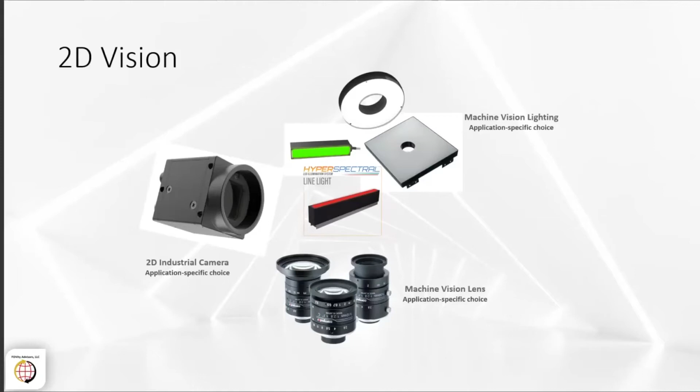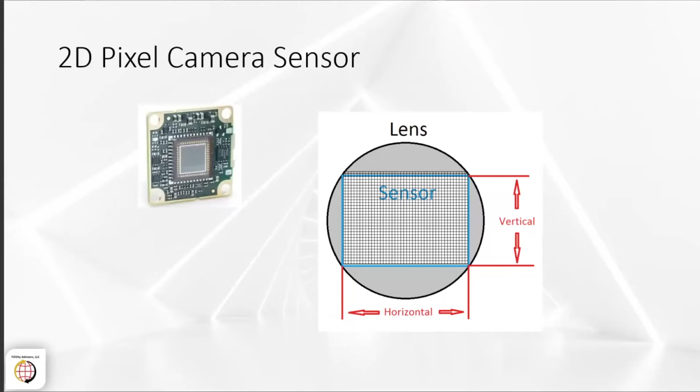You start with a 2D pixel camera sensor. And then to that, you add a lens, which focuses that light over that pixel matrix. The pixel matrix then, when we see what the intensity of the light is at each particular pixel, we can begin to get some information about what's in that image or in the scene that we're looking at. We can get grayscale information, we can detect edges and patterns, and we know size and shape because we know what the horizontal and vertical addresses are for each one of those pixels and the corresponding grayscale.

So the data that's returned is X and Y position and intensity from 0 to 255, with 0 being black and 255 being white. If it's a color camera, they'll put a different color filter over each one of the pixels, and then software decodes the various grayscale values for what the corresponding colors would be.

To calibrate for size, we put a known grid, something of known dimension, in the field of view of the camera. Typically it's a dot grid, though it doesn't have to be. We know what the distance is between the dots, and because we know that distance, we can translate from pixel space to world space. This can also compensate for lens aberrations.

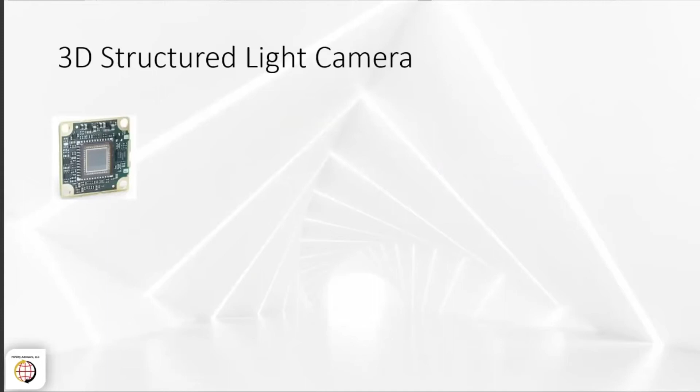By projecting a series of patterns, you get some light displacement, and through triangulation you're able to see what the patterns are and what the depth is. So again, you start with a 2D sensor, the same type you have with 2D vision, the same kind of lens, still focusing that light intensity information onto the pixel matrix.

So the question becomes: what's the geometric relationship based on the apparent positional displacement of the patterns? If you project a sufficient number of patterns over an object, you can get detailed information on the geometry of that object.

In comparison to a 2D sensor, with 3D vision data you still get the intensity from 0 to 255, the same as before. But you also get X, Y, and Z location—so in addition to horizontal and vertical, you get a depth location. The difference is a term called the voxel, a volume pixel, as opposed to the pixel used in 2D. In the 3D world, they're called voxels, and that's the location within a point cloud.

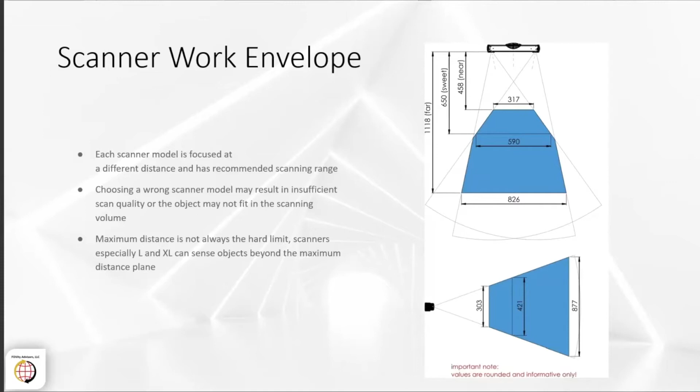And again, the reason is that just as in 2D world, you've got a certain depth of field, a little bit of flexibility there that you can work with. You have the same thing in 3D world. Again, the optics are the same. We're just working with a different structured light.

So the PhoXi 3D scanner product family, then, if you look at the specifications to the left, the purple, the little XS, the optimal working distance there is 181 millimeters or about 7 inches, with a field of view of 4.45 by 3.27, so about 4.5 by 3 inches, and a resolution which is tighter than 2 decimal places. It's actually 0.06 millimeters of resolution.

Now, resolution is different in 3D land than it is in 2D land. Resolution in 3D land is the distance from one voxel to another, just as in 2D land it's the distance from one pixel to another. The calibration accuracy is kind of a misnomer. The calibration accuracy is actually a repeatability measurement. It's, from one scan to the next, what's the repeatability of the image that I get. So you can see we can get some really tight tolerance measurements with the XS because the field of view is small.

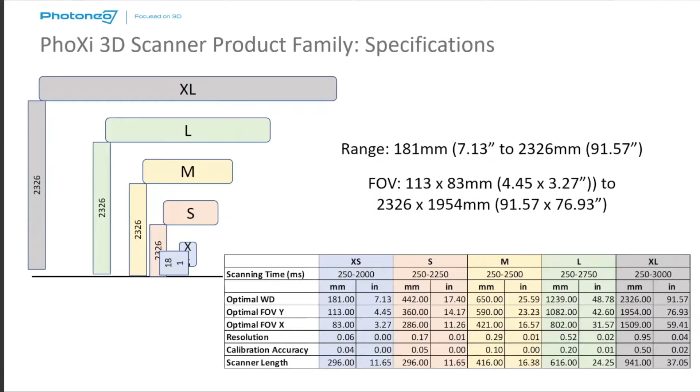But even with the XL, if we go to the other extreme, the XL has a 91-inch optimal working distance with 76 and 59 respectively for Y and X, and yet it still has 40 thousandths of an inch of resolution across that working distance. So we have a working distance of 8 feet thereabouts, and we can still go down to 40 thousandths in resolution. And also, just as in 2D land, where you combine pixels to give you a tighter resolution than pixel by pixel, the voxel resolution works the same, because you can statistically determine based on the intensity of the voxels and their location geometric attributes.

So what kind of applications would we see with 2D versus 3D? Well, in 2D, if you're looking at the surface, that's where 2D really shines. No question, you can get higher resolution with the megapixel cameras and the various high performance lenses. You can certainly get a higher resolution for metrology. You wouldn't do metrology with 3D, for example. If you're looking at image features such as barcodes, labels, if you want to do color, 3D doesn't really do color the way you can with 2D. And if you're moving fast, well, it takes time to handle all of the data on a 3D system. So if you have a high-speed application, chances are you're not going to do it with a 3D scanner.

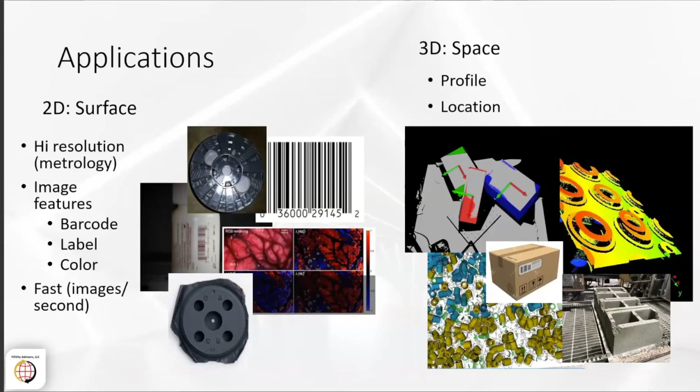But if you're interested in a profile and you need shape information, location information in 3D space, such as some of those applications there, then absolutely 3D is the way to go. And George will show you in a few moments that you can do inspections in Matrox Design Assistant in 3D that are impossible to do in 2D. For example, he's going to talk about the cookie and the depth of the cookie, and you can do coplanarity in 3D, which is almost impossible to do with 2D. You can look at other surfaces, and of course, for vision guidance, 3D is absolutely a must nowadays.

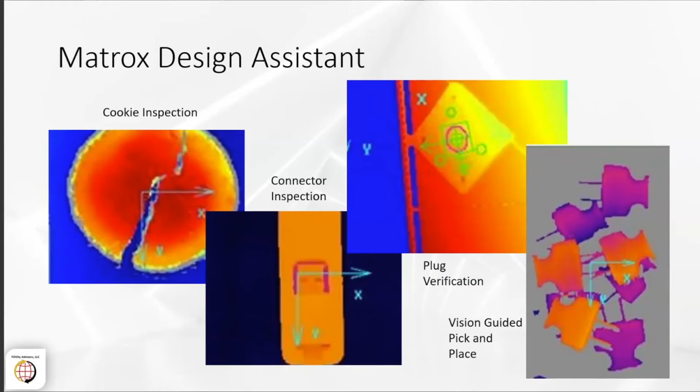In this part of the presentation, we will go over some of the software aspects of 3D inspections.

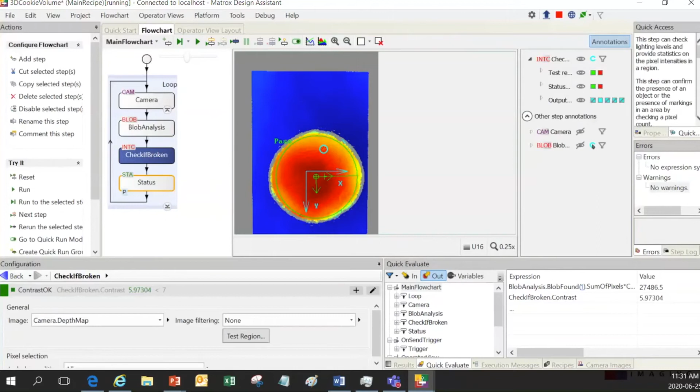The final step in my flowchart is the status step. And the status step is basically a status collector.

So it's actually going to check the pass-fail for my blob, in this case the volume, if it's within my tolerances. It can also check the pass-fail of my intensity checker to make sure that there's no broken cookies. And it will give me an overall score as an overall pass-fail.

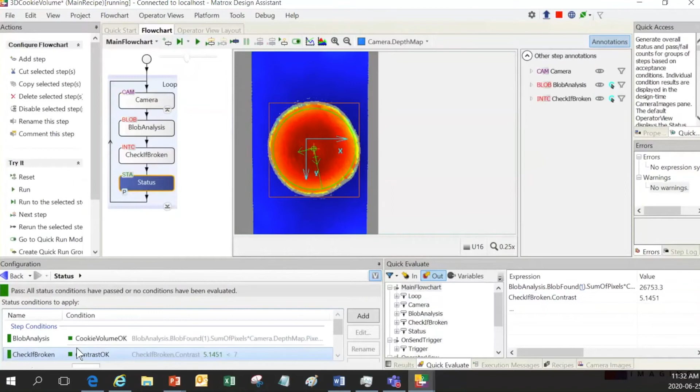So we're going to go ahead and step through and see some of the values that we have with the different samples of cookies. So this one is saying that it's a pass because volume and intensity check pass. This one is a pass as well. This one is a fail because there's contrast that goes beyond my tolerance, as well as volume is not complete. And so we have another one that is broken, and so on and so forth.

So again, Design Assistant is able to build an application fairly easily to inspect volume as well as cracks in the cookie. And obviously this could be useful in the food industry, verifying content, verifying volume, and portioning, for example. And again, we're using 2D tools on a 3D depth map.

Once we're satisfied with the logic, we can go ahead and build our operator view, which is a customized HMI. You can actually add buttons, pass-fail, results, and values. And once you're satisfied with the look and feel, you can choose to deploy the project with this button. And what you will see is the project running on a web page. It's a web page-based HMI, and this is the application. You are able to, again, indicate pass-fail lights and showcase some of the results.

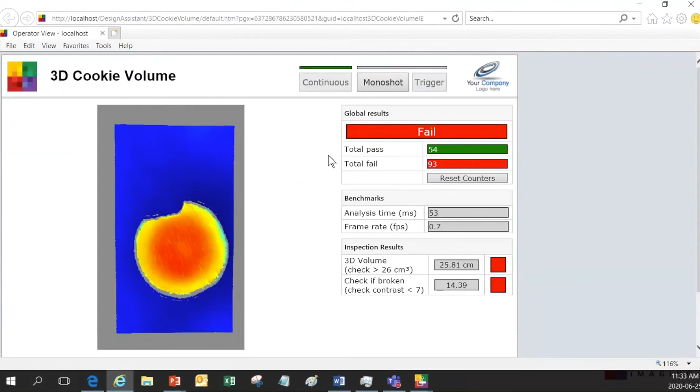You can go in triggered mode and show fail or pass, or run in continuous mode, right? So this would be something more along the lines of an actual inline inspection. So once again, the concept is using 2D tools on our 3D depth map. And as you can see, you're able to build a project by building a flowchart. Very easy to use, very easy to set up. So this is the first use case we have for you.

The second one actually involves verifying an assembly. Here we have an assembly of connectors. And the task is to find a reference point or a fixture point and add 2 checks for intensities or heights, making sure that they're at the same height level. So we're going to see some of the sample images that we got. And just like in the other example, let me run one loop of this project. And I'm able to see what we're doing.

So here we have the camera step again. This enables me to load a 3D depth map. Then I have a pattern matching tool to locate a fixture point. In this case, it's the top of the component. I then go ahead and specify one ROI or one sampling region where I want to check the height. And it's telling me that the height is a specific value that I can see over here.

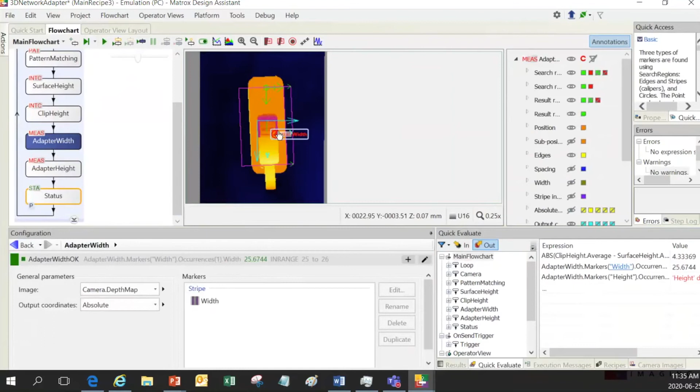I use the same reference point to indicate a second region of interest, more in the connector. So I'm going to see that on this intensity checker. And in this case, I'm able to put a condition and verify that the difference between these 2 should be less than 1 millimeter, for example, to make sure that this is a pass. After that, I can add a measurement tool to measure the width. And this is a 2D measurement, the width and the height of the adapter, as well as to put in my pass-fail conditions, if it's in range or greater than or smaller than.

And at the end, I have the status step, which is, again, a collection of all the overall pass-fails. And we can see that in this particular case, for this connector, we have a fail in the clip height because this region and this region are not at the same level. That's our pass and fail condition. It should be less than 1, and it's actually about 4 millimeters. But in width and height on the 2D measurement, it's a pass because they're within my ranges.

I can cycle through another couple of samples until I find one that actually passes. Here again, the value of this intensity checker and this intensity checker are within my tolerances, as well as the X and Y. So again, another very simple to put together 3D application using Design Assistant and using our 2D tools on the depth map.

This type of approach, finding a fixture point and then putting multiple regions for height inspection, is very useful in different types of kitting applications where you want to detect presence or absence based on height, in case the 2D image doesn't give me the information.

All sorts of assembly verification as well. Again, we can inspect heights in those cases.

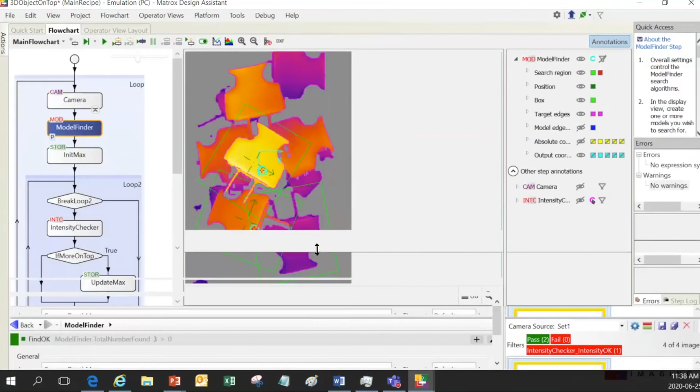In here, first of all, I use a model finder to find potential candidates for sampling my different heights, and actually have my model defined over here, the electrical connector. And once I find all the 3 potential candidates, I do a loop, try to cycle through all these candidates and try to find which one is on top or the topmost. And then for that, I actually keep the index of the topmost and pass on the index and the location to my pick and place robot.

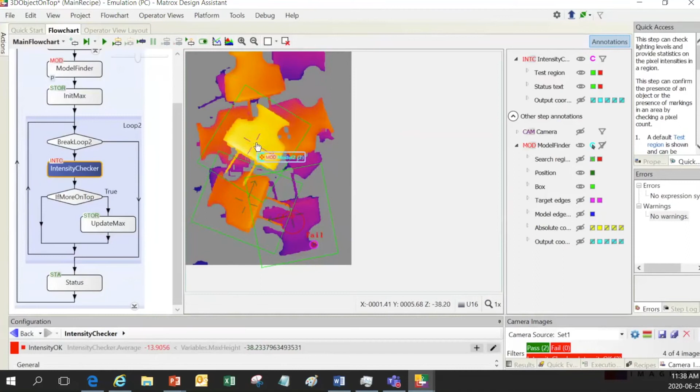So here, for example, the intensity checker is telling me that for the first one, it's calculated a specific height and it's this value. Then I go ahead and cycle through the second candidate and the third one. And actually I keep the topmost one index, for which I then pass on, again, the location or the XY location. In this case, I'm able to see that the model finder returns the position, XY coordinates, to my end effector.

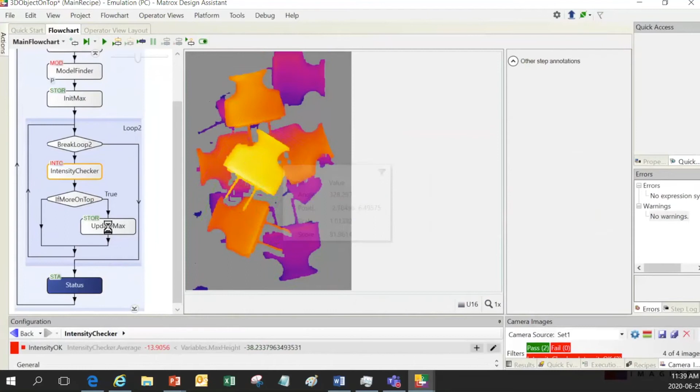And at the end, I go ahead and do this for all my parts. I'm able to do this once that's picked up. I'm gonna go ahead and try to sample the next scene or field of view. And again, this is a typical pick and place application where we are able to find the topmost item in the pile.

And the last use case we got for you today, this one is a very interesting one. The challenge here is to determine if this metal plate that has a drill hole in it has a plug that is inserted in there. So not just presence absence, but we need to find if the plug is inserted flush to the surface, so parallel to the surface.

This application comes in very commonly in automotive, for example, if during the paint process there's drill holes, you need to drain the liquid or paint. At the end, you need to put in plugs to make sure that those drill holes are properly plugged in. Most of the time it's a human process, and we need to verify that the plug is properly plugged in and flush to the surface. So we'll see how we're able to achieve this.

I'm gonna cycle through some images, and you'll see that they're placed in different parts of our field of view. And again, these were taken with a Photoneo camera. Some of these images have a plug, some of them don't. And you'll see that the plate is placed at different angles, right? Not just in 2D, but in 3D. So we're gonna go ahead and use our flow chart. We're gonna run one loop of this flow chart through the end, and we're gonna diagnose what was done.

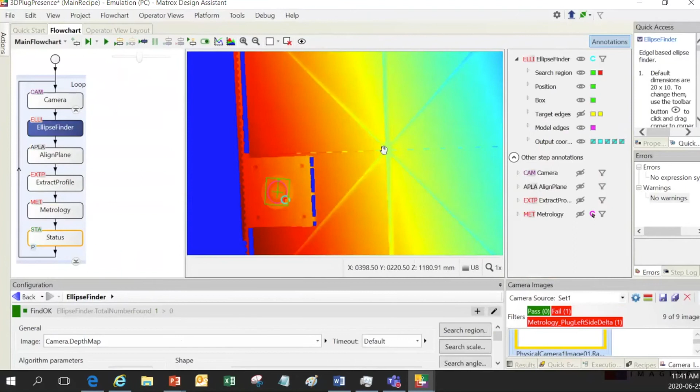So we look at here, in this specific case with this image, our camera step loads or captures a 3D image. We have a tool called Ellipse Finder that will actually find the location of the plug, or the drill hole. Ellipse Finder is a very powerful tool. Gives me a position. Then we have a new tool in Design Assistant 7 or EAX7, which is the plane alignment. What it does, it will actually align all our measurement tools to a specific plane. And in this case, we made it align to the metal plate, plane align tool.

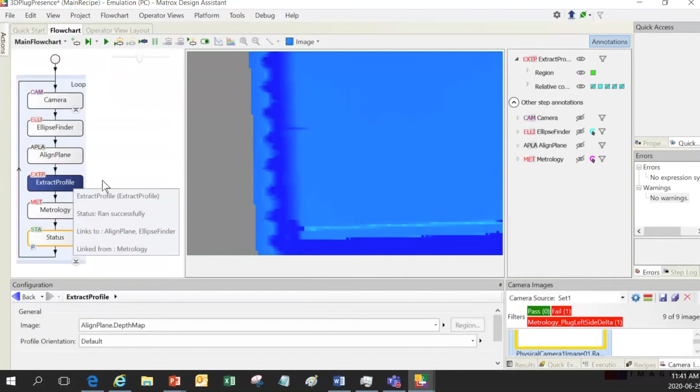We then use a tool called Extract Profile to extract a profile. So what we do over here is once we have a fixturing point, we define a line based on this fixture point, which will go across the plug, which will actually give me the profile of this plug.

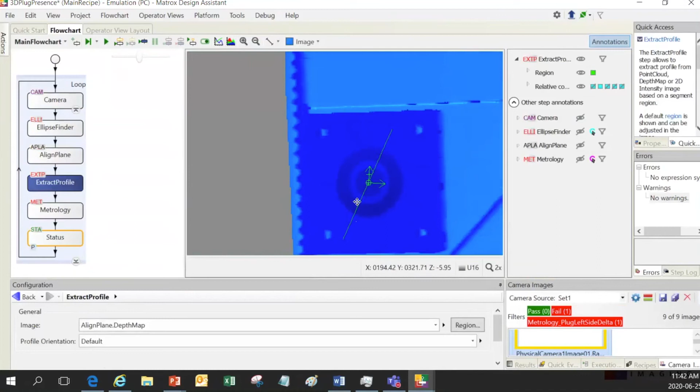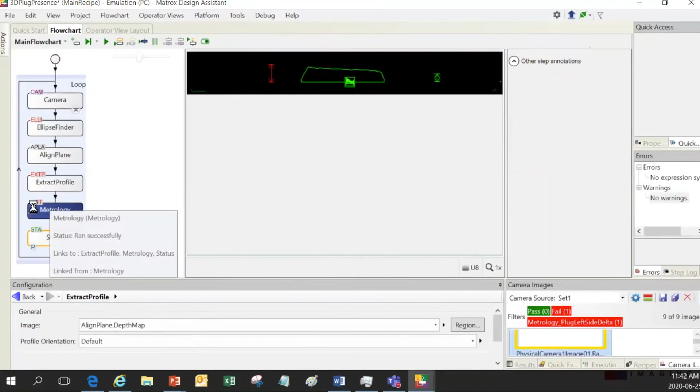And at the end, I apply a metrology tool to verify the different heights of my plug. So again, I actually added 5 different measurement boxes. The 2 on the side just measure the plate. Again, this metrology I'm seeing is based on this line profile that I have defined over here. And the other 3 measurement boxes are actually verifying the different heights of the component of this plug.

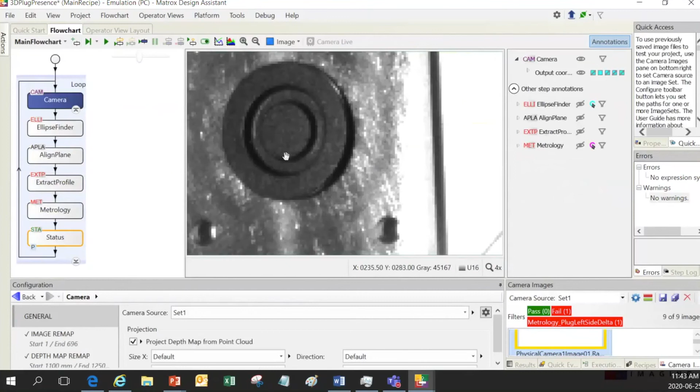Here I'm seeing the left, let's call it left wing of the plug. This is the center of the plug, and this is the right wing of the plug. You see, it's one of those type of plugs that have 2 concentric rings. So in this case, it's telling me that the left side of my plug is higher than my right side. And we're actually able to see it in our camera step. So we can go in and zoom in. And yeah, effectively, it looks like this side is a little bit higher than the other side.

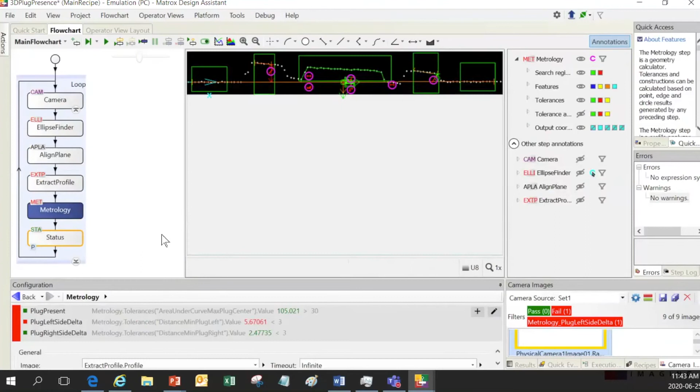So again, this is the power of Design Assistant. We're able to verify not just presence, absence, but also coplanarity, if an object is to a specific standard or a specific plane with another one. And here, like you all know, the status step is basically a collection of all the pass fails of my individual steps, and I'm able to see here that for plane alignment, it's a pass, but for metrology, it's saying that the left side of the plug is actually higher than the other side of the plug. So that's one of the results of my inspection. So we're gonna cycle through a couple of them just to see how this actually performs.

Here, for example, it's telling me that the plug is not present because the metrology is telling me that in the middle, my measurement is not even there, right? So it's outside of my spec. For the next part, I'm able to see that the plug is there and it's actually flush against the metal plate. And we're able to run the same project, although the plate is placed at different angles. So this is very interesting for all sorts of applications that have different drill holes at different angles, and we could actually extrapolate this for multiple drill holes.

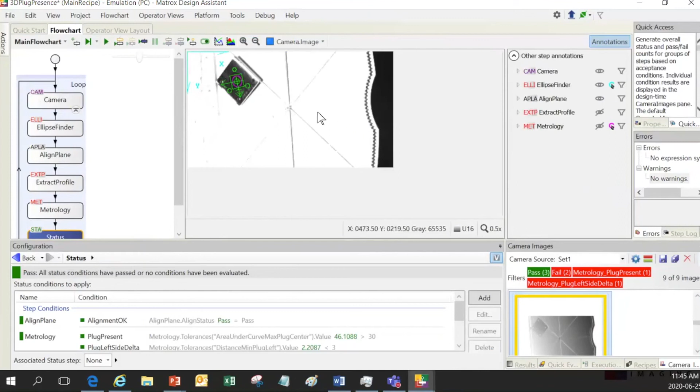Again, pretty much the same process that we had with the pick and place application, where we loop through all occurrences. We could do the same for our drill hole in case there are multiple drill holes and multiple plugs. So this concludes our 4 use cases for 3D inspection. And again, the message is we're using some of our 2D tools on a 3D depth map in a flowchart, which is easy to use, easy to put together, and you're able to build applications in 3D.

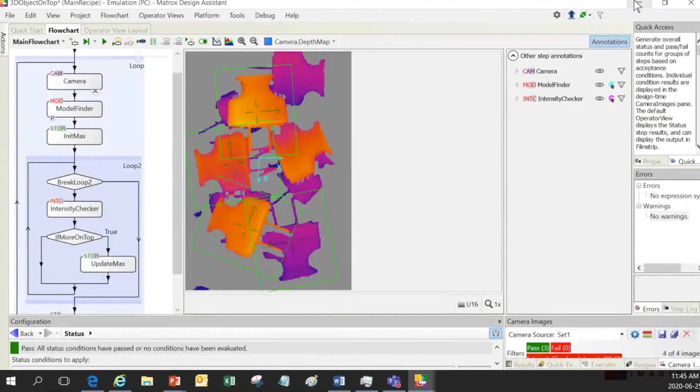So going back to our presentation, just to wrap it up, you can tackle 3D inspections today. Design Assistant and Photoneo have made it very simple to capture. The Photoneo camera becomes almost like a point and click camera, but you actually get 3D information. We get very high performing 2D tools in Design Assistant that can be applied to this 3D depth map. We get circle finder, model finder to locate and fixture. We got blob analysis, intensity checker to verify volume and height information, and a lot more tools in the Design Assistant interface.

And new in DA X7, we get new tools like plane alignment and metrology in 3D, which provides even more capability for 3D inspection. And all of this without the need of traditional programming. Long gone are the days where you have to program C# just to program a grab.

And I'll conclude my part of the presentation by sharing a pro tip. I think this is very applicable to these days of working from home. You could capture images from Photoneo and store those 3D images for offline development. A lot of times you may not be able to be close to the setup, so you can go ahead and take all the 3D images that you need, and work offline, pretty much like I have shown you in these 4 use cases.

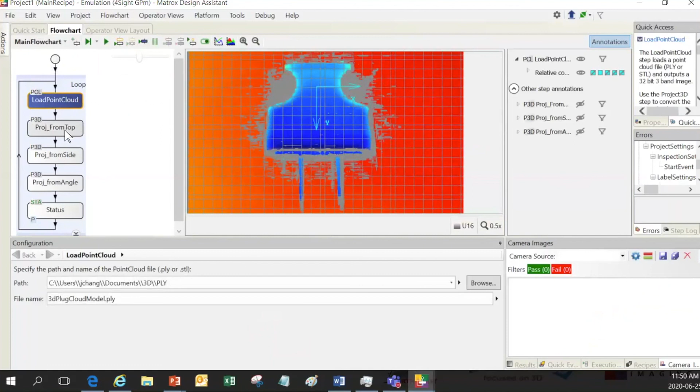I figured that was a DA-related question. Can DA load a PLY file from disk and use it? Yes, certainly Design Assistant can load a PLY file. In fact, I have a quick project showing that you can actually load the PLY, and from that, use an image projection to project it into a depth map. Again, pretty much like the use cases we showed you, you're able to apply 2D tools to our 3D PLY or depth map. So the answer is yes.

Very cool, I guess good chance you had that up on your screen. Okay, this sounds like a Photoneo question. Can I use a 3D scanner like Photoneo and a 2D camera on the same system? Good question. The answer is it depends. That's really a software thing, because the output of the scanner is just a 3D point cloud camera. So whatever the input software is, if it will accommodate two different signals, if you've got a frame grabber with two channels, chances are you can do it. So the answer is maybe.

I'll jump in on the Matrox Design Assistant side. Certainly, you can create a flowchart with multiple camera steps, and each camera step can represent either a Photoneo camera or a GigE or USB3 Vision camera. All of those can actually be plugged into our 4Sight EV6 industrial PC, which has 4 PoE ports. So you can directly plug in up to 4 GigE PoE cameras in addition to the Photoneo camera. I think that answers that question.